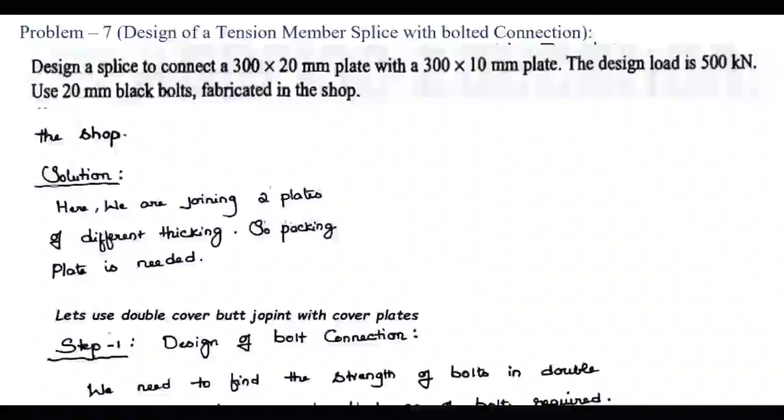In the previous video, we have seen about the tensile member splice, what it is, and why we use it. As I told you, the splice is nothing but a cover plate used to join any two members to make them a single member.

Let me read out the question for you. Design a splice to connect a 300 by 20 mm plate and a 300 by 10 mm plate. So we are connecting two plates of the same width, but the thickness of the two plates is different, and these two plates have to be joined together by a splice which you have to design.

When we are talking about designing the splice, we need to consider three parameters: thickness, width, and length of the splice.

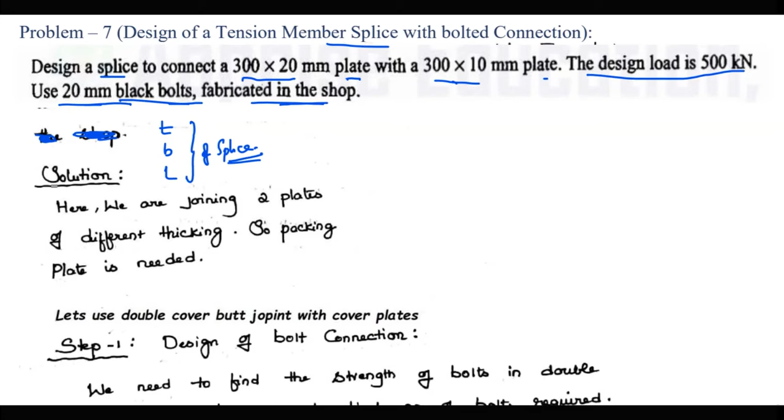The design load is 500 kilonewton and 20 mm black bolts are being used, and fabrication is done in the shops. For fabrication done in the shop, 1.25 is the partial factor of safety; for fabrication done in the field, it is 1.5, gamma mb.

Let us go to the problem. Since these two plates are being joined like this, this one is 20 mm and this one is 10 mm thick.

So we need a packing plate. As we are joining two plates of different thickness, we need a packing plate, so that they come to a common thickness of 20 mm. What should be the thickness of the packing plate? 10 mm, just to fill that gap.

This is nothing but a packing plate, or filler plate also. So now you put this splice plate here and at the bottom, and you are going to bolt it. This is nothing but a cover plate, or splice plate. So now we have to design the splice plate.

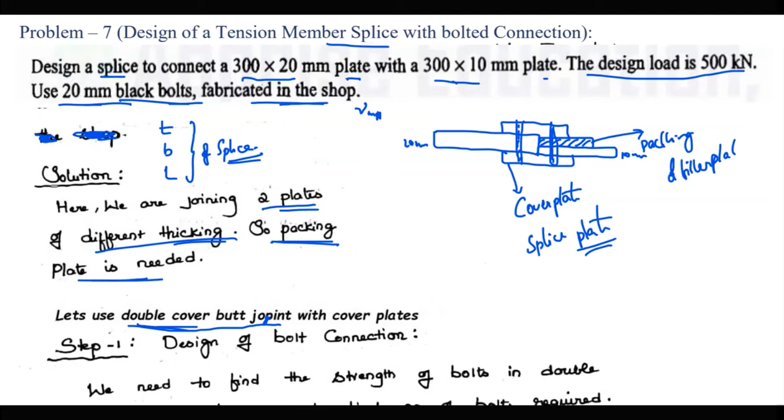Let us start with the first step. Step 1, design of the bolt connection. You have to decide how many bolts are required to make that connection, to join those two tension members together. Let us find out that.

We need to find the strength of the bolt in double shear and in bearing also, to find the number of bolts required. As you can see here, this is the splice plate, and this bolt is going to experience shear at two layers, at two sections. This is section one and this is section two. So we need to find the strength of the bolt in double shear and also in bearing.

Let us start with the double shear. The shear strength of the bolt is given by this expression. How did I get this equation? Shear strength of the bolt equals Anb into Fu divided by root 3 gamma MB, into beta p k.

Here, Anb is nothing but the net cross-sectional area of the bolt, and it is taken as 2 times this value. We are multiplying by 2 because 2 layers are going to experience shear.

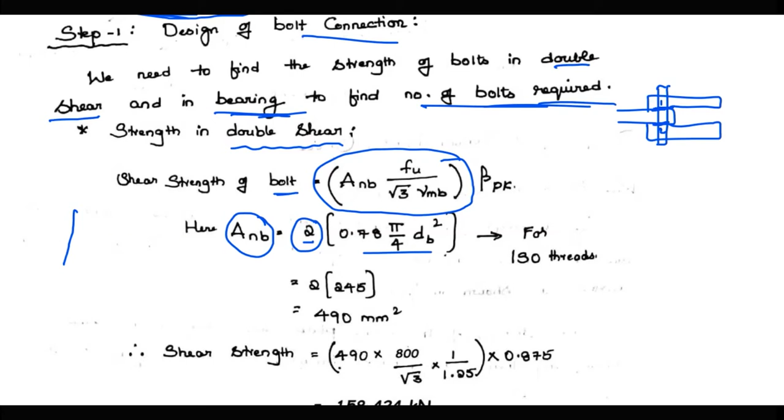So when you take a bolt, this is how a bolt is going to look, right? This is the head, and this is the shank, and this is the threading. Remember, the diameter of the shank is going to be greater than the diameter at the thread portion. See here, this is how it looks, threading, right? So here the diameter is different, and here the diameter is different.

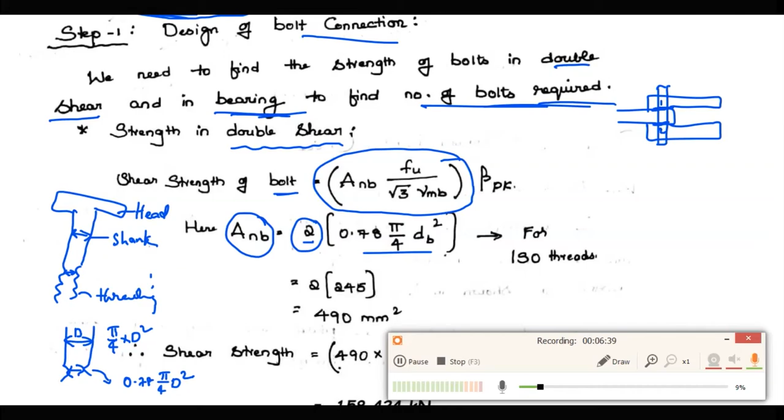Now, according to this code, the shear capacity is given by Vsb equals this expression.

Therefore, Vsb equals, putting this here, what will it become? N into Anb, plus Ns into Asb, divided by gamma MB. What is N and Ns?

N is the number of shear planes with threads intercepting the shear plane, and Ns is the number of shear planes without threads intercepting the shear plane. Here, this is the shear plane.

This is a shear plane. One shear plane, one, but it is not passing through the threading, right? It is going through the shank, and there is another shear plane here. It is going through the threading. So there is one plane passing through the shank, one plane passing through the thread.

So from this figure, what is NN? Number of shear planes with threading intercepting, only one, and shear plane without threading that is shank, that's 1. So NN equals to 1, NS equals to 1. So take out this NN and NS here. So now ANB and ASB can be taken to be equal.

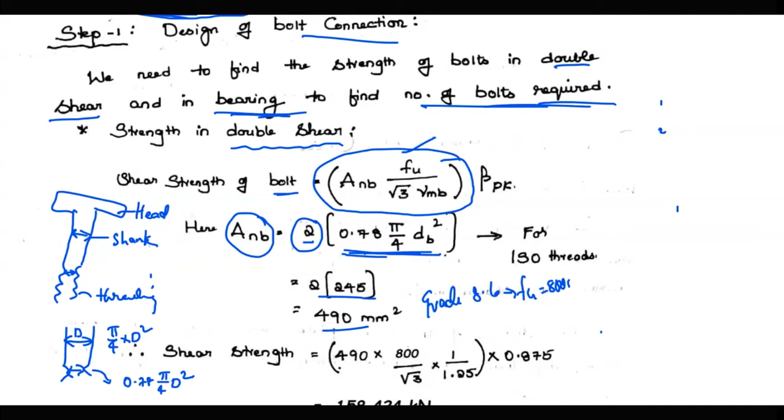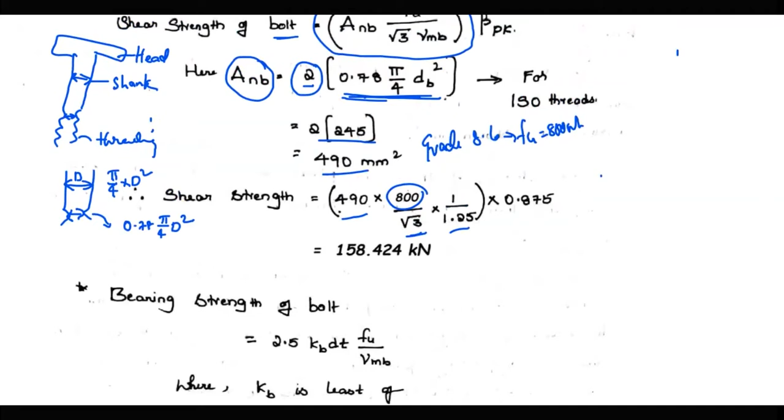So on substitution here, area, ultimate strength, root 3 divided by factor of safety. And remember, since the packing plate we have used is 10 mm greater than 6 mm, you have to use this reduction factor beta pk.

And beta pk is obtained from this simple expression here. What is that? Beta pk equals to 1 minus 0.0125 tpk, where tpk is the thickness of the packing plate, that is 10 mm. So on substitution, you are going to get beta pk as 0.875.

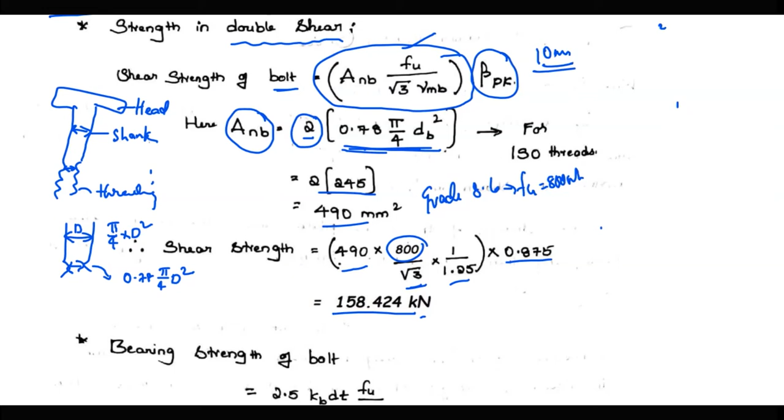And on multiplication, the shear strength of the bolt is 158.424 kilonewton. So now let us calculate the bearing strength of the bolt.

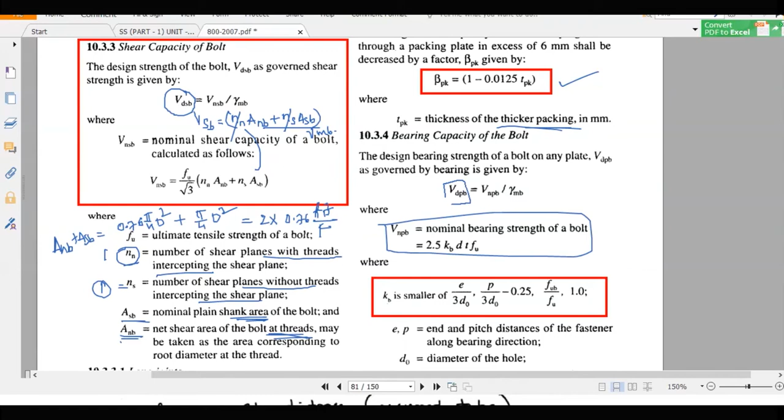So the bearing strength of the bolt is given by this simple expression over here, and this is taken from this clause. VDPB, it is nothing but design bearing strength of bolt, and VNPB is equals to this.

So therefore on substitution, 2.5 kb d t Fu divided by gamma mb.

So kb is a factor that is obtained from this clause 10.3.4. kb is taken least of these four things. Out of these four, the least value is taken as kb.

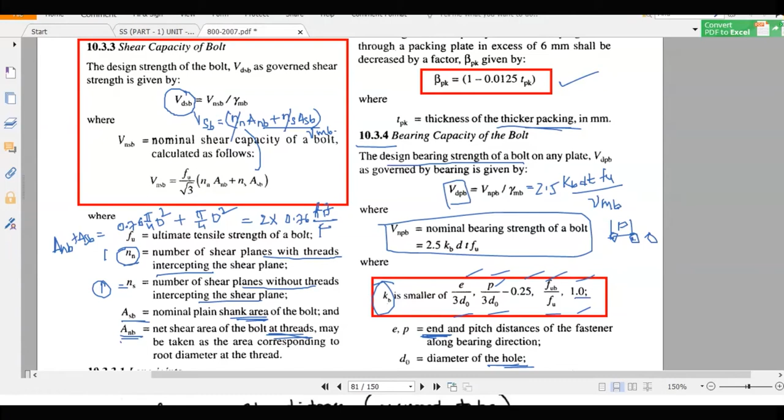This is nothing but end distance. We can assume a certain value from the code, and p here is the pitch distance, that is when the bolts are arranged, the horizontal distance between center to center of the bolt is called pitch. And d naught is the diameter of the bolt hole, not the diameter of the bolt, it is the diameter of the hole. And FUB is the ultimate strength of the bolt, and Fu is the ultimate strength of the plate, and 1.

So least of these values is taken as its value. Therefore, on calculation of KB, E by 3D naught, E value can be taken from the code book. Let me show you that. It is taken as 40, and pitch is taken as 60.

I will show you how these values are assumed actually. And d is the diameter of the hole. So in this case we have taken that the holes are punched, therefore diameter of the hole will be diameter of the bolt plus 2 mm, so 22 mm.

And on substitution, this value is 0.606, and here p by 3 into 22 minus 0.25 gives 0.65, and this is 1.95, 800 by 410, and fourth one is 1. So least of all these is 0.606, so kb is taken as that.

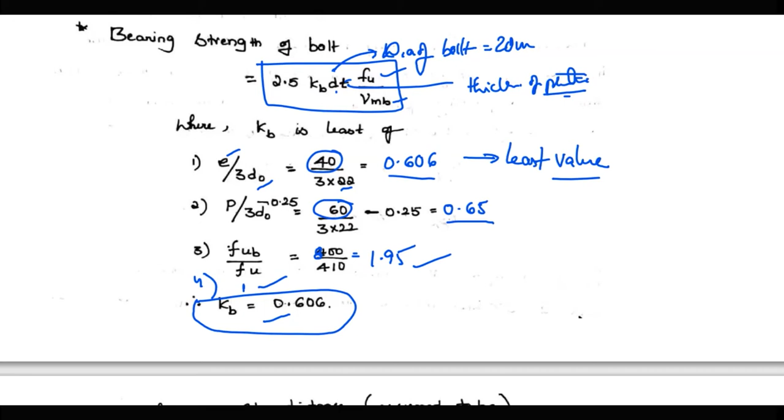And substitute these values over here, d and t and everything here. Remember, here d is nothing but diameter of bolt, that is 20 mm, and t is thickness of plate. And here we have two plates, isn't it, right? 20 mm and 10 mm. So out of those two plates, the least thickness of the plate has to be taken.

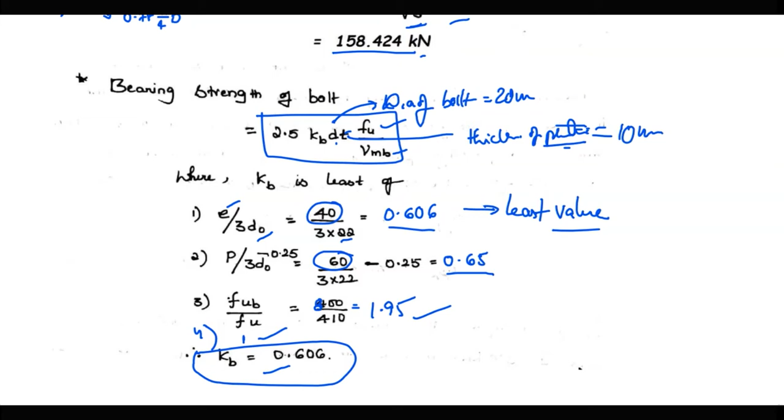Okay, let me go through the calculation. 2.5 into kb into d, 20 diameter of the bolt, into thickness of the smaller plate 10, and this is fu, the plate's ultimate strength, and gamma mb. On calculation you get 99.384 kilonewton.

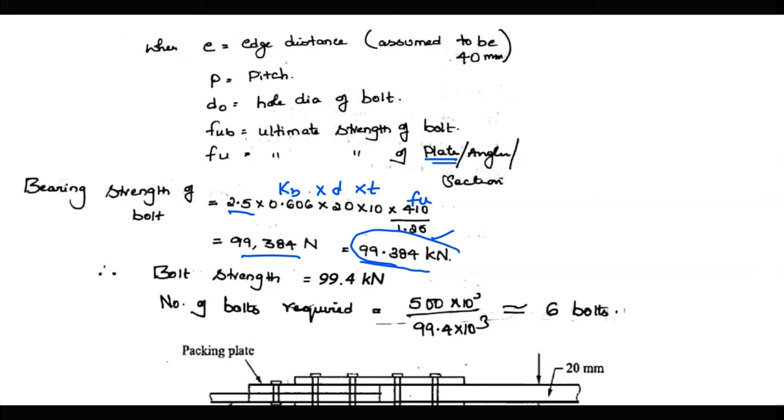So the bearing strength of the bolt is 99 and the shear strength of the bolt is 158. So least among these two is taken to be the strength of the bolt, that is 99.4. I just rounded it off.

Therefore, the bolt has to be able to take 500 kilonewton of force. That is what is coming from the plates onto this bolt, right? 500 kilonewton is the factored or design tensile load. So just find out, if each bolt has a strength of 99.4 kilonewton, in order to carry 500 kilonewton, how many bolts are required? Simply divide them and you will get something like 5 point something. Round it off to the highest value. So 6 bolts are required.

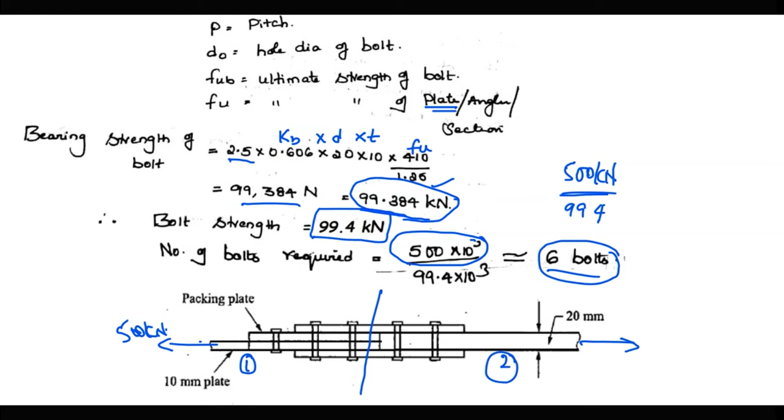So how am I going to put these 6 bolts? 6 bolts on each side. See, this is plate 1 and this is plate 2, right? As shown in this figure, we have 1, 2, 3, 4, 5 and 6 bolts here, and 1, 2, 3, 4, 5, 6 bolts on this side. So totally 12 bolts - on each side the bolts are 6. Now the width of the plate is given, this and this and everything.

Right, perfect. So now when you get the 6 bolts, you have to place it, and of course we are using a packing plate also. You put that, and you have to put a tacking bolt packing this packing plate and plate 1.

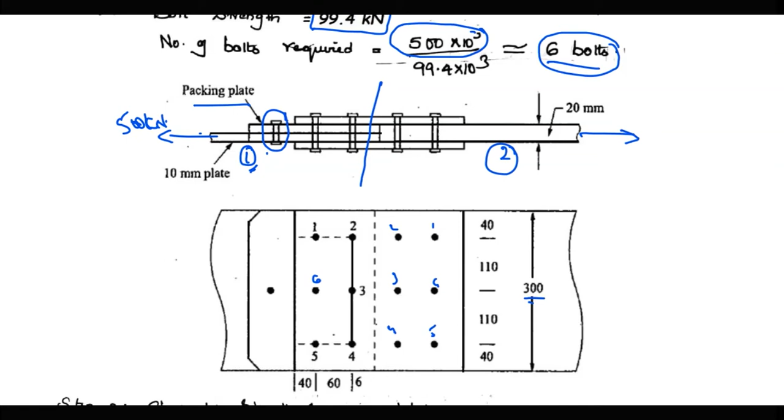Now the other thing here is, I told you I will tell you how I got the edge distance E as 40 and pitch distance of 60. These are taken from the code IS 800.

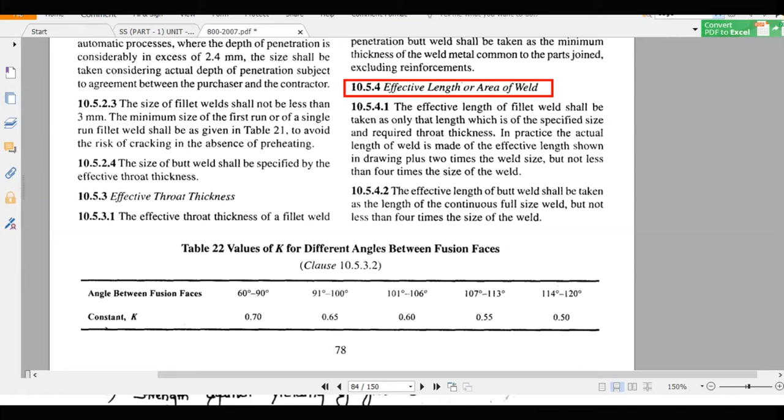Let me show you that. We are going to see about this in clause 10.5.4. It is better for us to go and discuss this at the end of this problem. So let us continue with the problem here. I have designed the bolts and decided how many bolts I have to fix.

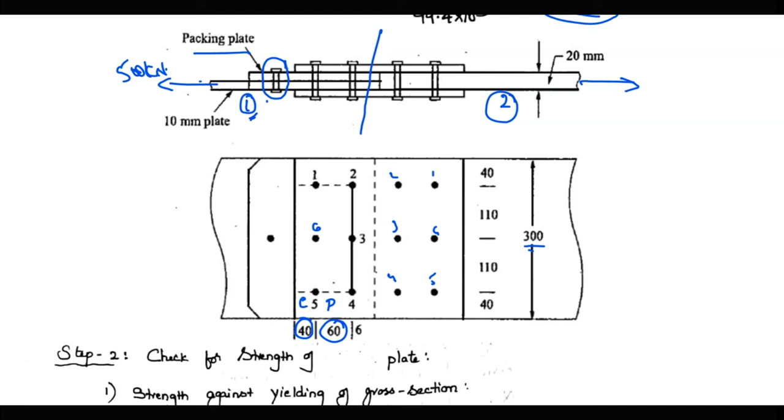So now step 2 is check for the strength of the plate - the connecting plate. We are connecting 2 plates here, right? So we have to check the strength of those 2 plates also. We know that the strength of the plates in the 3 failures should be greater than 500 kilonewton, because that is the load it has to carry. The tensile member has to carry 500 kilonewton. Therefore, the strength of this plate in yielding, in rupture, in block shear should be greater than 500 kilonewton. So you have to check that.

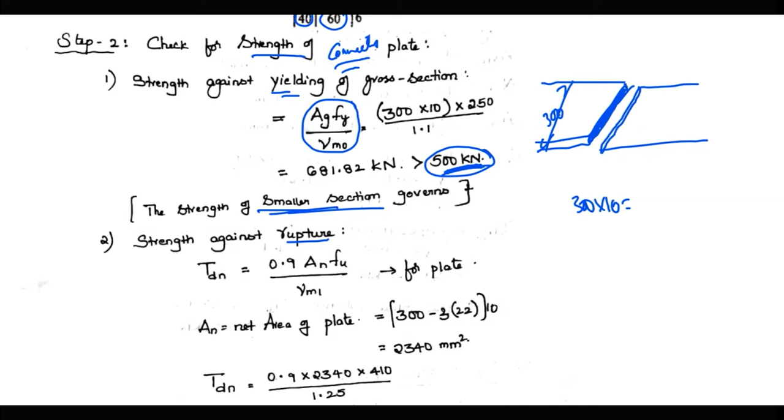Since it is a plate, strength in yielding is given by this expression Ag Fy by gamma m naught. Ag is the cross sectional area. We have 2 plates here, right? Take the least plate, smaller section. So what is the cross sectional area? The width is 300 and the thickness is 10 mm. So that is the cross sectional area, Ag into Fy 250, gamma m naught 1.1, factor of safety in yielding from table number 5 of IS 800.

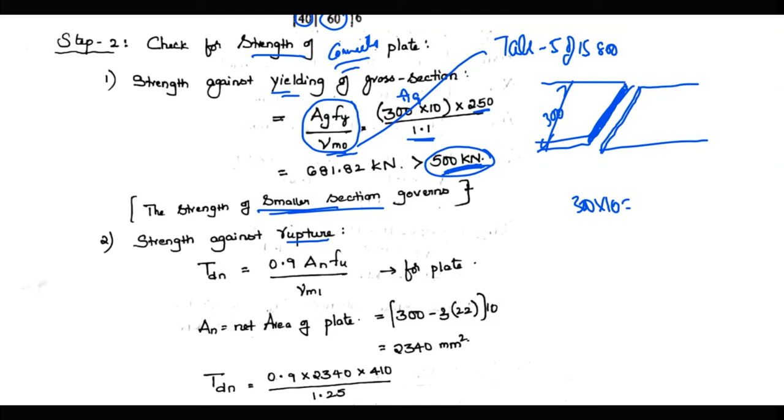Next, strength against rupture. When dealing with rupture strength, we have different expressions for plate, threaded rod, and angle section. Since it is a rectangular plate, this is the expression: TDN equals 0.9 AN FU by gamma M1. This gamma M1 is the partial factor of safety against rupture, which equals 1.25 from code IS 800. And FU is the ultimate strength, which is 410 Newton per mm square.

And what is AN? AN is the net area of the plate. See here, this is the plate and we have 3 bolts over here and here. Let us take a section here. We have 3 bolts, so what is the width? 300. In order to calculate net area, take the diameters of the 3 holes - 3 into 22, diameter of the hole 22. So you get the net length into thickness, how much, 10. This will give you the net area of the plate. On substitution, 690. As you can see, in both yielding and rupture cases, the value is greater than 500.

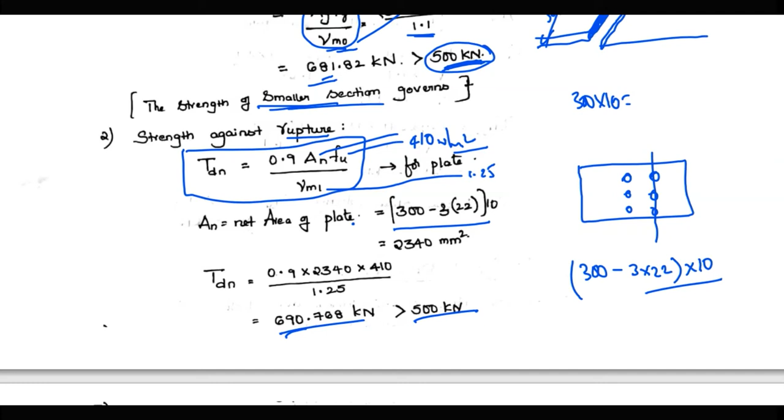So block shear is calculated along 2 lengths here. Why is that? Because we have 2 critical sections. Block shear failure can happen in 2 different ways - that is why 2 sections. Let me show you that.

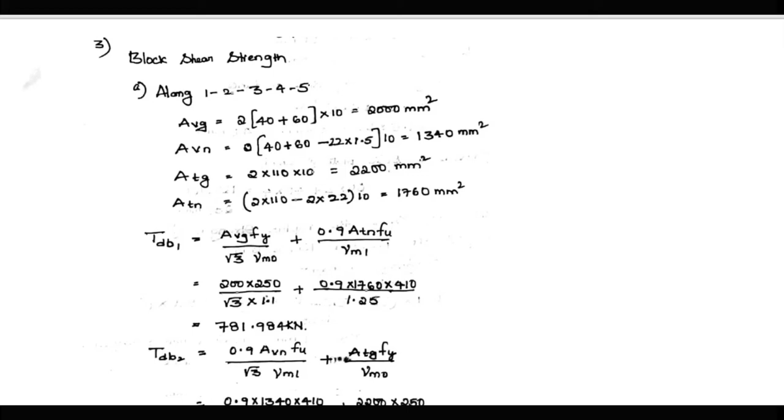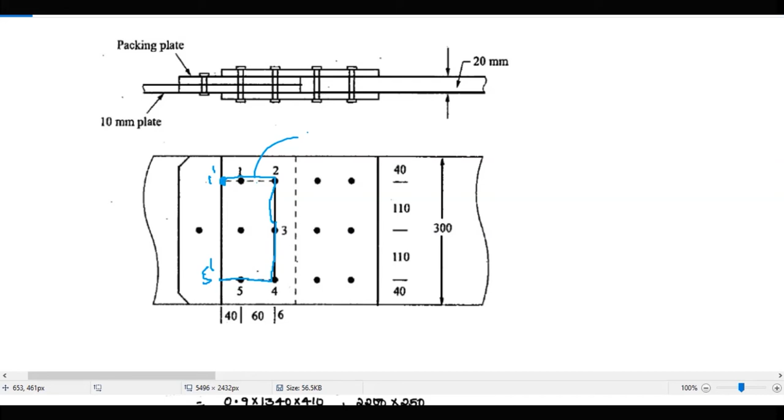See, this is one layer. This is how a failure can occur. It will go from here, 1 dash 1, 2, 3, 4, 5, here to 5 dash. From 1 dash to 5 dash the failure occurs. Of course this is the shear plane, and this is the shear plane, and this is the tension plane. Or it can occur in another way also. How is that? It can go from 1 dash, 1, 2, 3, 4, and this way to 6. This is 6, of course you can take 6 dash. So this is how a failure can come. And in this case we have only one shear plane and one tension plane. So let us find out the strength of this plate in block shear along both these failure planes.

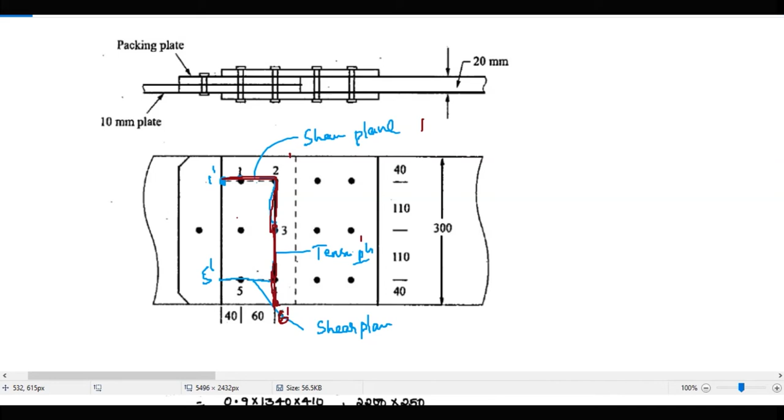So let us start with the first one, 1, 2, 3, 4, 5 critical plane. So now what is the AVG, what is the AVN, ATG and ATN? You know that AVG is the gross area of the shear planes, 2 shear planes. Here the distance is 40 and this is 60. So what is the AVG value from this? Gross area of the shear plane, from where to where - this plane here up to the center of this hole 2. So you can calculate the AVG as 40 plus 60 will give you the length of the plane. We have the thickness of the sheet as 10, or the plate as 10. We have 2 shear planes, multiply with 2, and you get 2000 mm square.

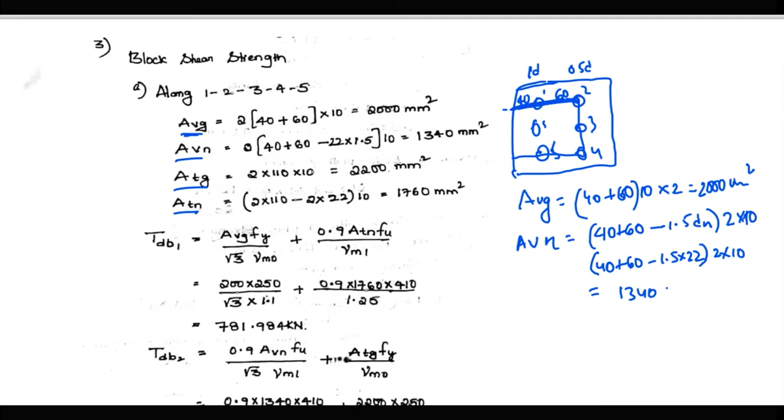And ATG is the tension plane. The tension plane extends from center of 2 to center of 4, center of 2 to center of 4. So for ATG, this value is given as 110 and 110. From 2 to 3 is 110, from 3 to 4 is 110 as given in the figure, we took this as the gauge. So 110 plus 110 will be the length of the tensile plane, into 10. You will get 2200 mm square.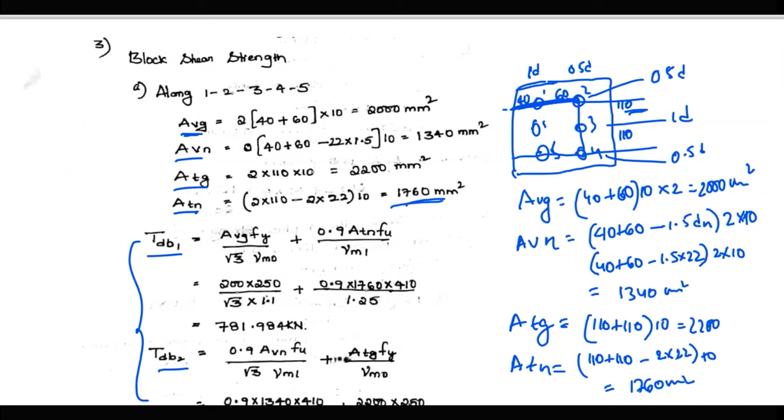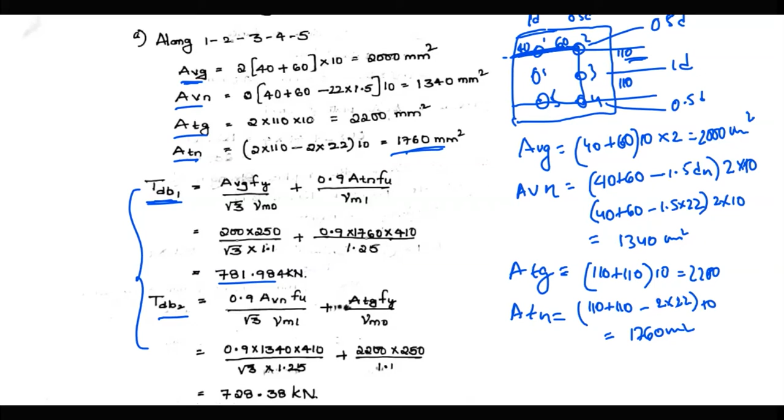Next, ATN, net area. So here at 2 we have 0.5D, at 4 you have 0.5D, at 3 you have 1D. So how many bolts are there? 2 bolts only. So 110 plus 110 minus 2 times of 22 into 10 will give you 1760 mm square. So for TDB we have two equations, right, we have seen in the previous problem. We have two values, and upon calculation the least of these two values has to be taken as block shear strength. So TDB1 is 781 and the second one is 728. So the least of these two will be taken as the TDB value of this - we can take this as TB equals 728. So this is the least.

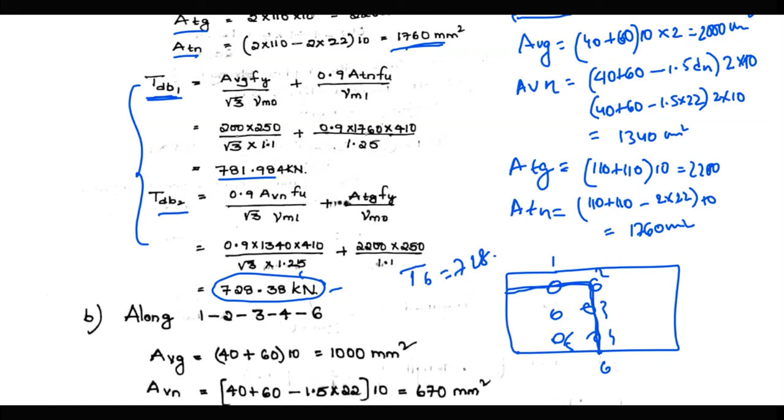But we have another critical section also, 1, 2, 3, 4, 6, right? So this is the section of the plate. This is 1, 2, 3, 4, 5, and here this section is 6. So it is coming like this - this is the failure plane. So upon calculation of AVG and these terms, you can come to these values. We have only one shear plane and only one tension plane in this case.

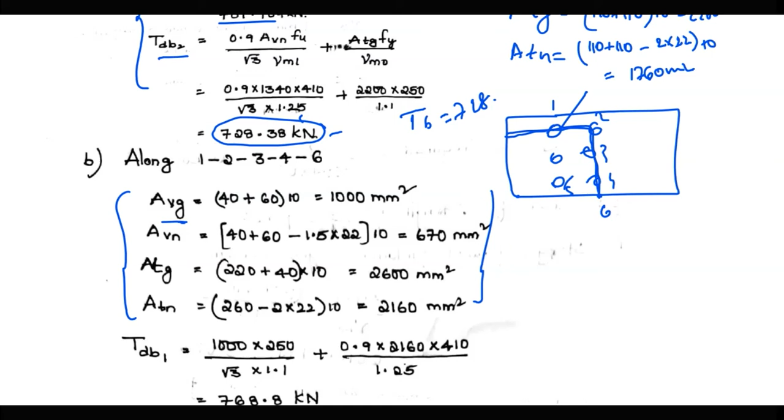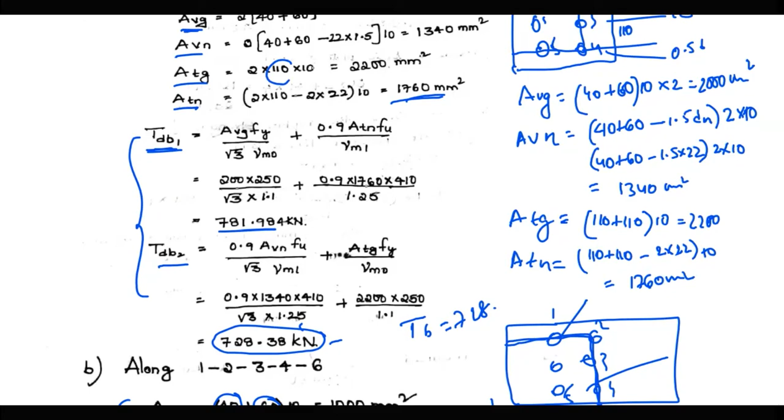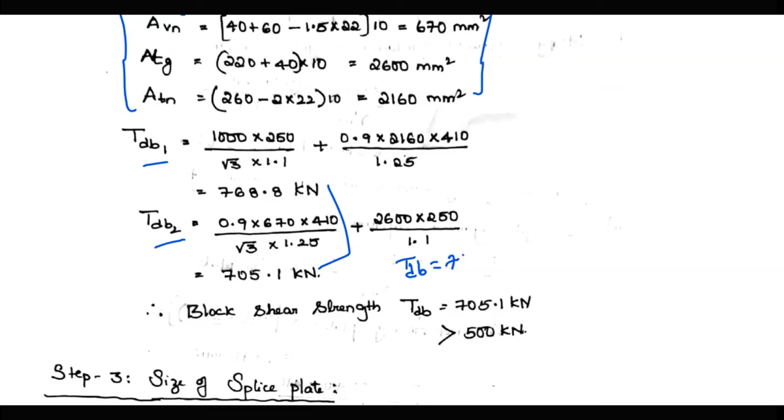And similarly, according to this plane 1, 2, 3, 4, 6 also, you calculate what is TDB1 and TDB2, and the least of these values is to be taken as the TDB value, which is 705. But again we have two planes, right - here it is minimum 728 and here it is 705. So the least of these two again should be taken as the block shear strength, which is 705. Absolutely, as I told you, it will be greater than 500 kilonewton.

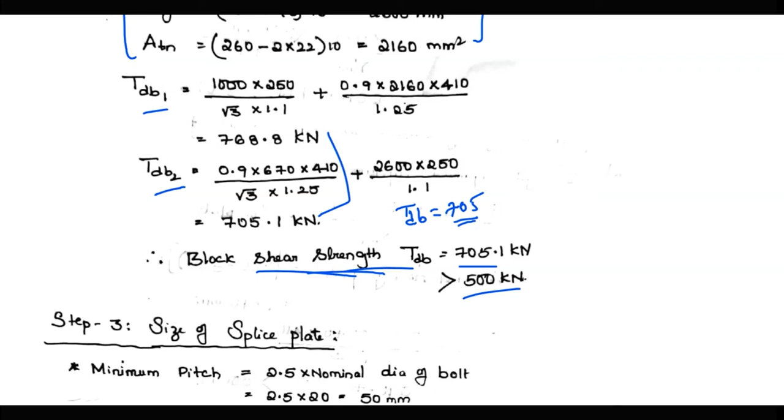So now we have done the first connection. Next we have checked for the strength of the plate, and now we have to go for the design of the splice plate. So generally, see here, this is the plate. Let me just erase this and draw this.

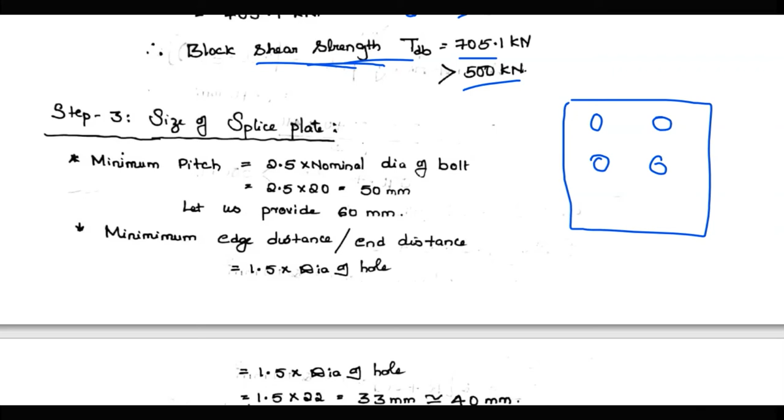See here, these are the bolts or fasteners. Distance is always calculated from center to center of this bolt or bolt hole. So this distance is E, edge distance.

And from here to here, it is pitch, represented with P, and this is the direction of tensile force, right? So pitch will be the distance measured between two centers of bolts, from center to center, along the direction of force.

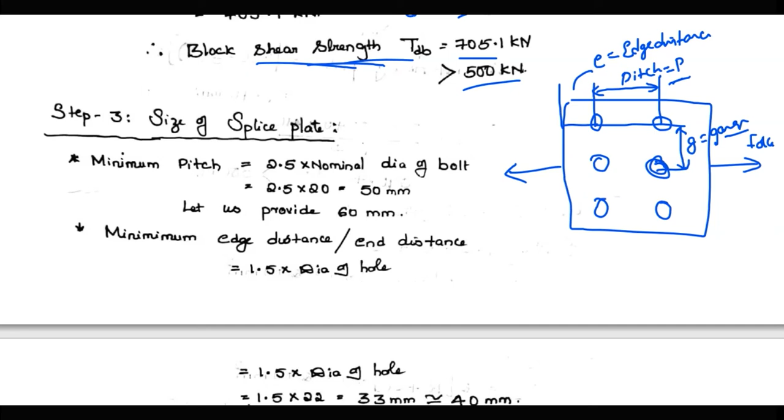Remember that edge distance and end distance are the same. The criteria for both those things is the same. So minimum pitch is to be 2.5 times the nominal diameter of the bolt.

So what is the nominal diameter of the bolt? Diameter of the bolt is 20mm. So 2.5 times, minimum pitch has to be 50mm. Since 50mm is the minimum, let us provide 60mm as pitch P. That is what we did. We provided this pitch as 60mm.

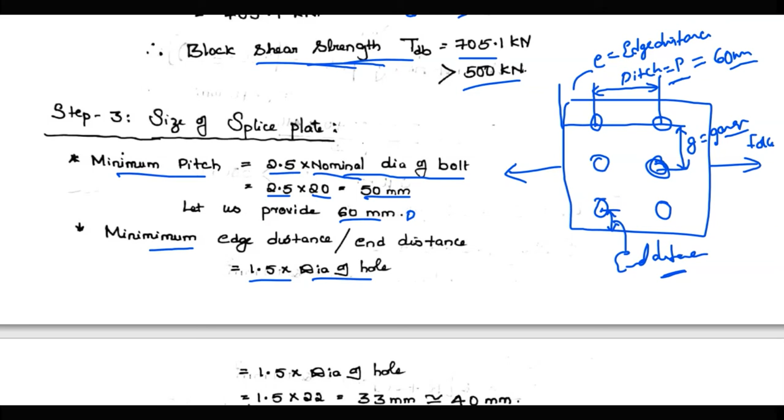Now what is the edge distance? What is the minimum value? It is 1.5 times the diameter of the hole. Diameter of the hole is 22, and 1.5 times 22 gives you around 33. Therefore I have taken 40mm to be the edge distance or end distance.

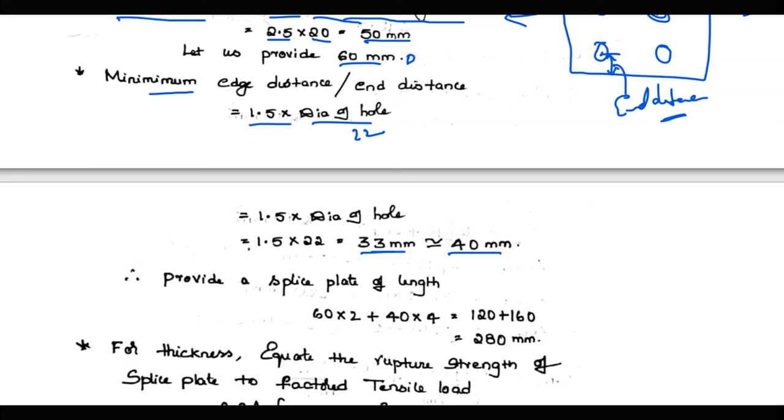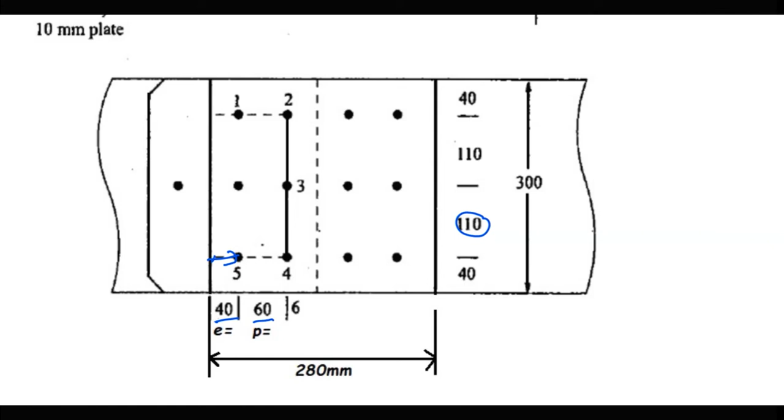Okay, so now let us see this figure here. We are providing 40 as edge distance and 60 as pitch and 110 as the gauge length. How I got this gauge length is easy. See, this edge distance and end distance are same, so if this is 40, this is 40, this is also to be 40, and this is also to be 40.

So if this is 40, 40, then 300 minus 80 gives you 220. Since 3 bolts have to be placed here, the intervals between each bolt should be 220 by 2, which equals 110. So gauge should be 110.

That's it. Okay, so now what is the length of the plate? See, from here to here, this is the length of the splice plate. How much do you think it is? This is 40, this is 40, this is 60, and this is 40 again, and this is 40, this is 60, right?

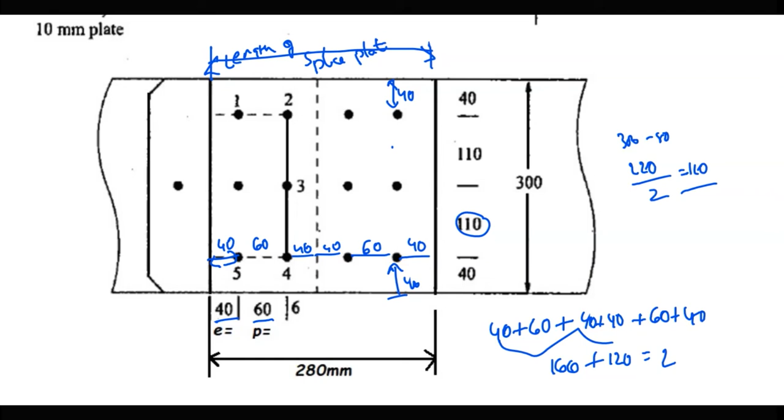So now let's find out. How much do you get? 40 plus 60 plus 40 plus 40 plus 60 plus 40. How many 40s are there? 4 40s, so 160, plus 2 60s, so 120. So what should be the length of this plate? 280. So 280mm is the length of the plate.

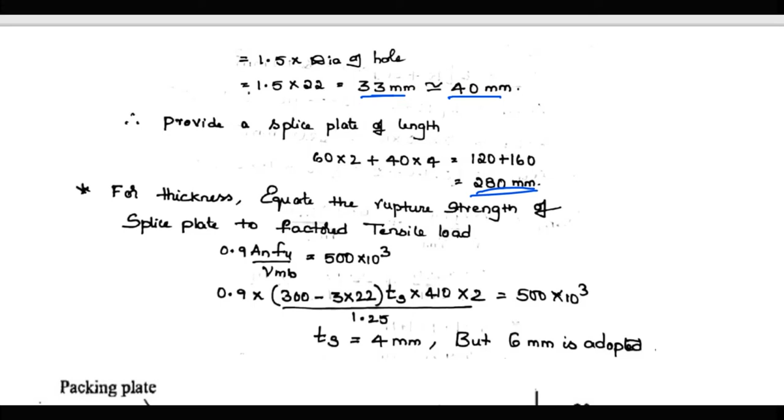So length of the plate can be only obtained once you find out what is the edge distance and pitch. Okay, 280mm, and let me check this also. So you know what is the length? 280mm, good. And width is 300mm.

As I told you, width of this plate will be equal to the width of the plates it is joining, so 300. But the other thing is thickness. What is the thickness of this plate? In order to get that, you have to equate the tensile load with the rupture strength of the splice plate, not the connecting plate, but the splice plates. So you know that 0.9 AN FU by gamma MB is the expression for calculating rupture strength for any plate.

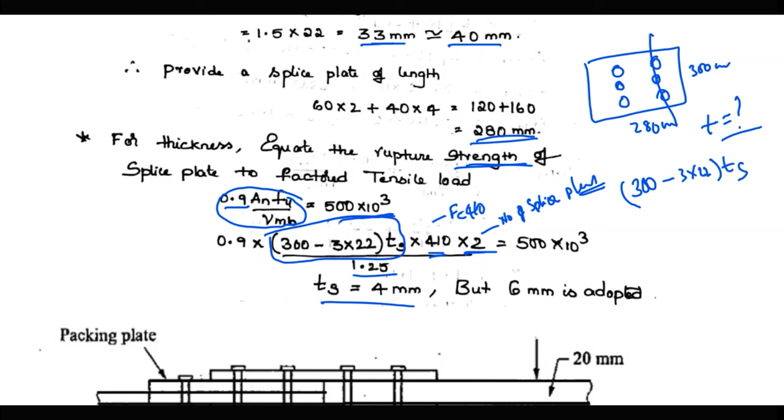Okay, so this is how you design a splice plate. So I'm going to give you a homework on this.

This is your previous examination question which came in the 2016 JNTU paper for 14 marks. Design a splice for a tension member of 160x10mm and 250x14mm. It is joining two tensile members in this way, and the design tensile force is 200 kilonewton, and the grade of steel is Fy equals 250. Therefore Fu will surely be 410 Newton per mm square.